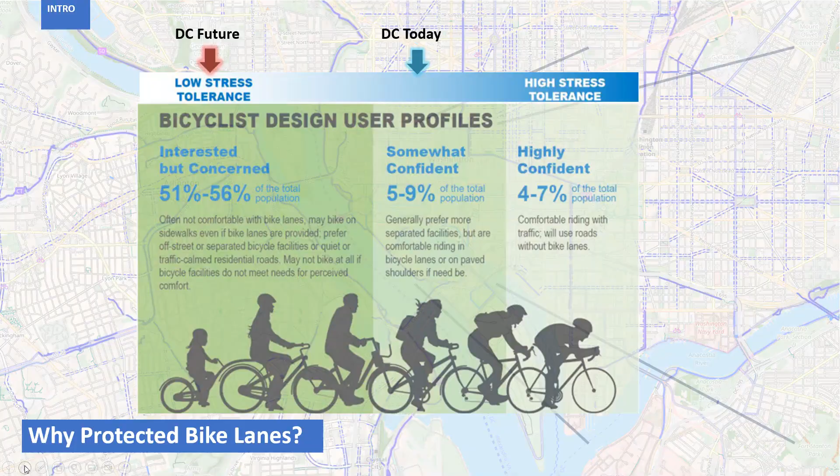In terms of the work we were doing on the 15th Street corridor, as with most of our projects, we begin to look at the existing conditions evaluation, how do people walk, scoot, bike, roll and drive, where are crashes happening, etc., before moving into the design and 100% design of interim improvement plans, with a 30% design of more longer term improvement strategies that would occur once those interim improvements are evaluated, and then ultimately can be completely designed in that 3 to 5 year time frame.

Of course, NPS is a large stakeholder within the corridor we're looking at, and so how did DDOT and NPS also continue to improve and maintain those improvements as well?

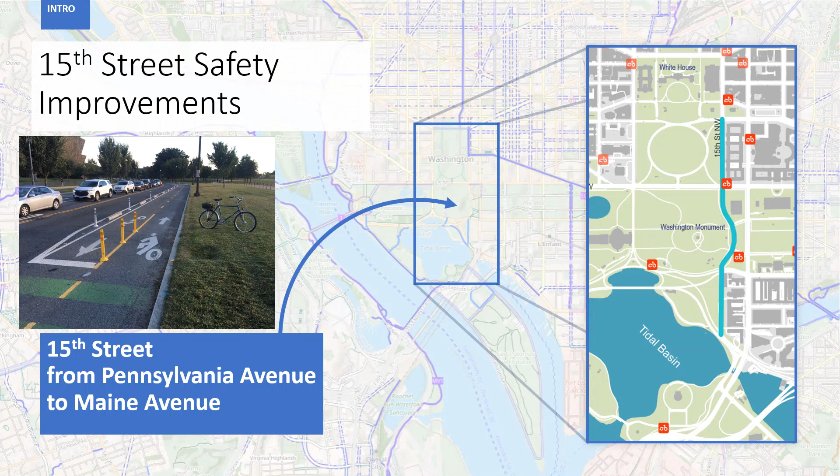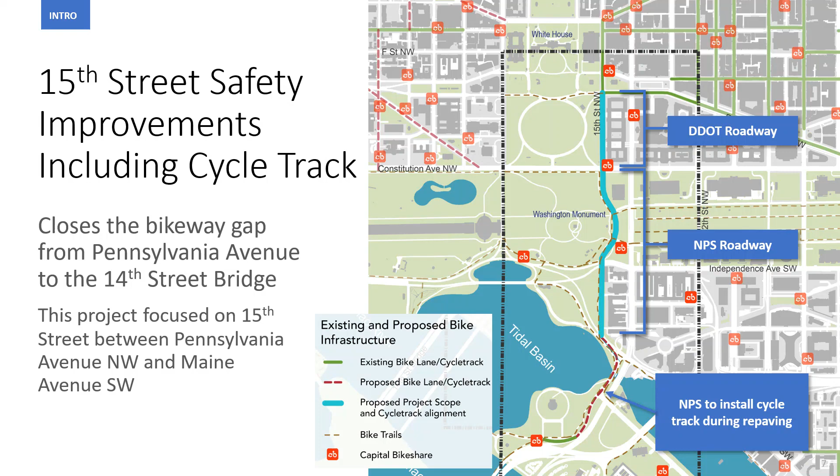So the corridor itself is the 15th Street safety improvements, 15th Street from Pennsylvania Avenue down to Maine Avenue. If we look at that, it takes into account not only DDOT roadways, but NPS roadways, and a forthcoming NPS project to the south of Maine, which is installing a cycle track all the way to the 14th Street Bridge. Really this project began to take a look at that missing link on 15th Street between Pennsylvania Avenue and Maine Avenue.

This is born out of almost a decade plus of planning. It was incorporated in the National Mall Plan, it was in the MoveDC Plan of 2014, it was in the Paved Trails Study from NPS in 2016 as well, and really begins to fill in this missing link both locally as well as regionally within that central CBD area of DC, heading out into North Virginia as well.

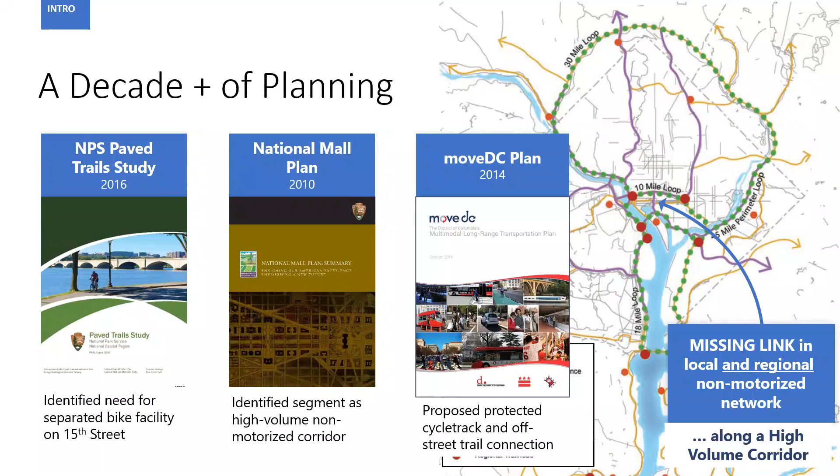And it's certainly confirmed through big data as well, as we begin to look at the shared scooter heat maps and the Capital Bikeshare maps, as well as Strava, that you can begin to see here. The 15th Street corridor is one of those vital connections, not only for everyday activities for commuting and getting into the central business district, but also for tourists as well. It's certainly right there in one of the nation's capital's most iconic corridors.

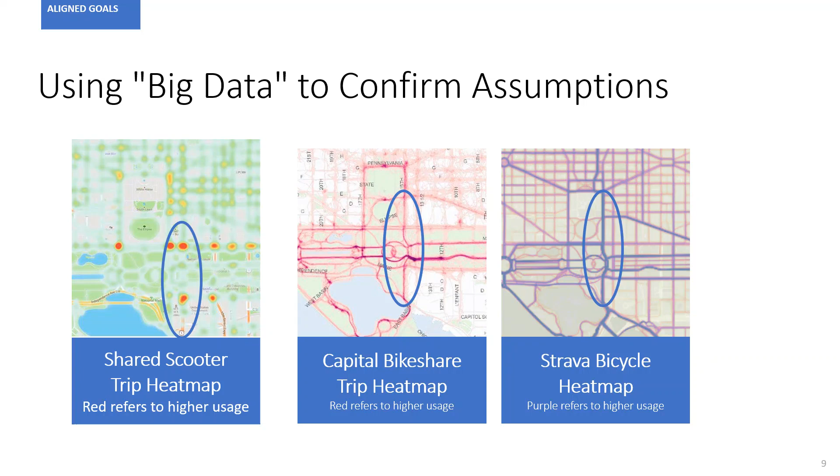So how did this begin to get funded in terms of the design? DDOT were creative and began to look for funding to handle these odd ownership and legal divisions as it relates to NPS and DDOT, and the Federal Lands Access Program enabled them to use funding for not only improvements of safety, but improvements to multimodal access as well. And it enabled DDOT to actually own the project management and spend those funds on federal land. So it was almost a win-win situation for DDOT as well as NPS moving forward.

In terms of who we've begun to consider in the design, we knew we were trying to accomplish three things: safety, ease of use, and then balance that access and delay as well. And we know there are multiple ways people were getting around within the corridor. As we mentioned before, it's rolling, it's scooting, it's transit, it's personal vehicle ownership. Lots of different user groups that we had to entail here, including visitors, who are certainly an important user group.

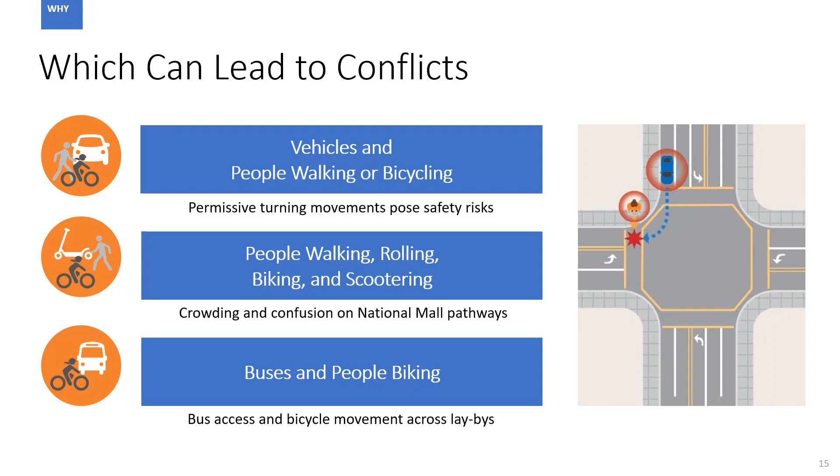There's 3 bus laybys that we had to incorporate along the National Mall on the west side of 15th Street. There's a DC circulator route. There's the big bus sightseeing companies that begin to use these laybys. And they all really needed to be considered, because there are multiple conflicts we've begun to see throughout the corridor, particularly at the major intersections of Independence and Constitution on 15th Street. So we certainly had to align with them as well.

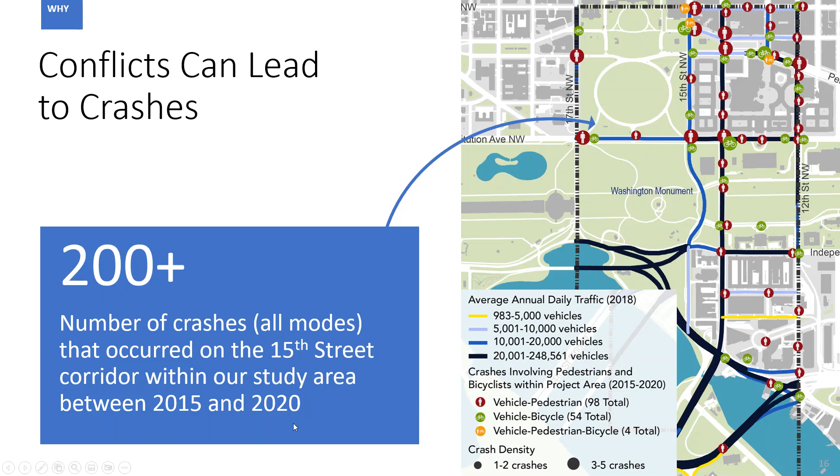Looking at the crash data, as we began our study in 2020, looking back from the previous 5 years, there were 200 plus crashes within the corridor of multiple types, all of which could generally be minimized to a certain extent through better design.

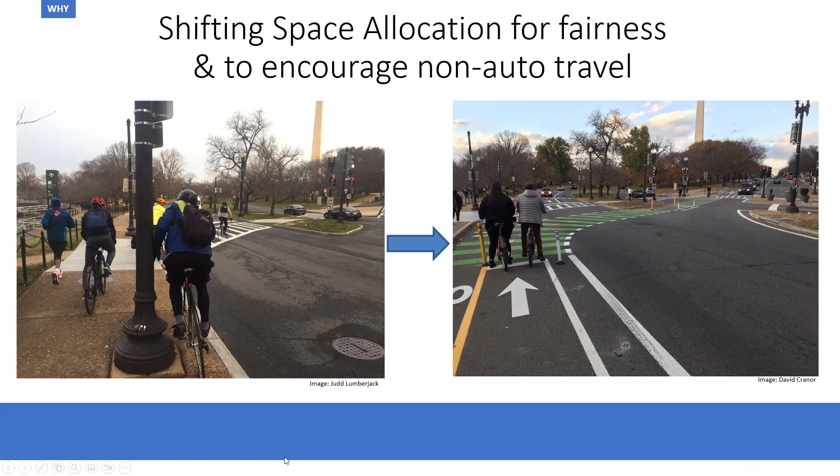If we look at why we wanted to shift space for fairness, the picture on the left shows cyclists using the sidewalk, with a runner there too, and no dedicated space for any particular user or non-auto user. The picture on the right shows after the project was implemented, which begins to show why shifting this space makes sense.

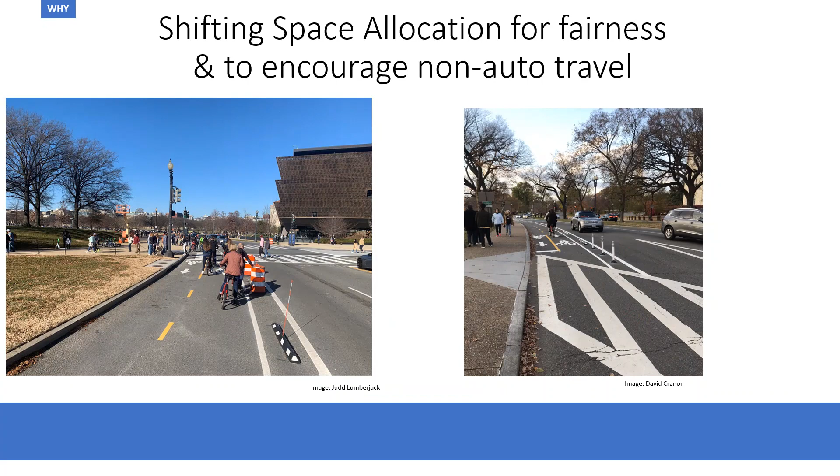The pictures we have are both after the fact, sourced from different users online, from social media, of people actually using these facilities once implementation was undertaken. This is always a good one - new space, new constituencies.

The 15th Street cycle track was actually a completion portion of the East Coast Greenway as it moves through DC. It's making people realize how implementation and design can be done correctly, done relatively quickly. As Michael Bradley said, it completely changed the way people look at streets and what can occur once things are done correctly.

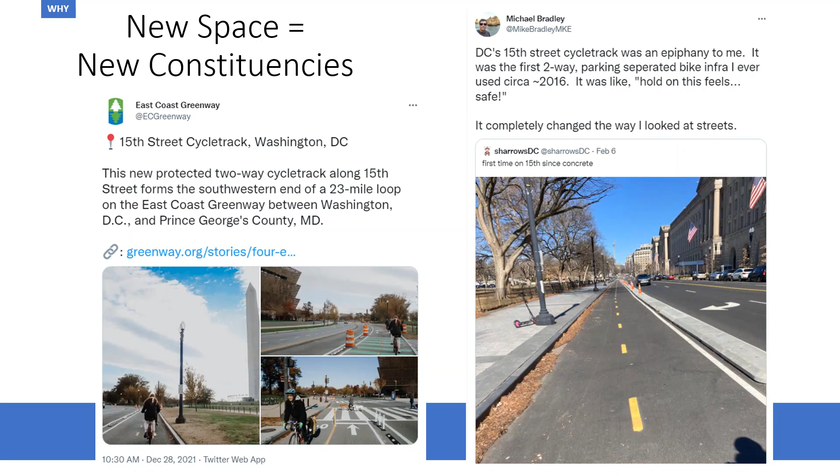What we wanted to do, from a coordination perspective, was really make sure we had equity between different uses. You can see here, this is a before picture - riders are amongst parking, amongst regular travel lanes.

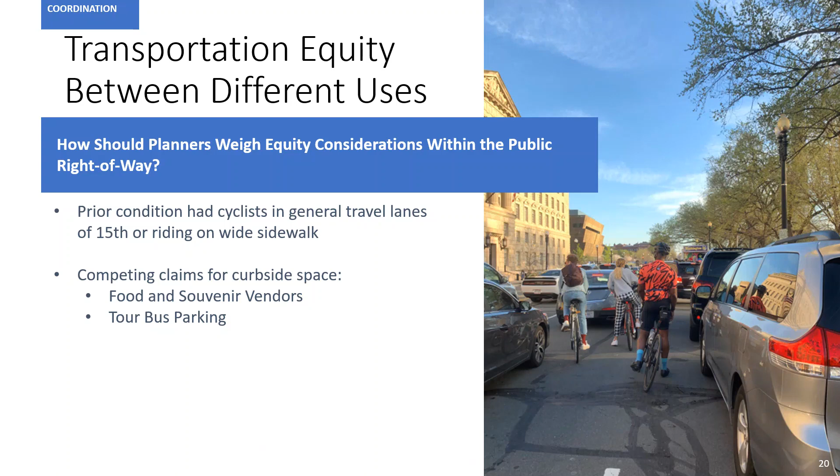We knew there was curbside space use going on, certainly through the portion between Pennsylvania and Constitution, where there are food and souvenir vendors and tour bus parking. Being able to make sure those uses were also considered and able to be relocated - they were relocated relatively close to their existing locations.

It was ultimately a decision by DDOT to make sure the curbside use was being used correctly and for the highest and best use, which wasn't necessarily vending for that purpose, but making sure those people making a living on a daily basis were not put out of business - they were relocated. With that, Will can go into a little more of the design considerations that our team, as well as DDOT, went through.

Yeah, thank you. I think John's going to take this. Yeah, okay, sorry John. I think you and I could probably also interject on all this. So when looking at actually designing this... John, you're muted. Of course, I gave my first 30 seconds up to muting. So I guess maybe when I play the video, it mutes me.

So just believe that this is actually a live action shot of folks enjoying the tidal basin, our new facility, during the Cherry Blossom Festival last year.

From the outset of this project, one of the conditions was we wanted to try to keep everything within the existing curbs. Similar to a lot of the rapid deployment of improvements around DC, this was viewed as a paint-and-post type project where we wouldn't be moving any hardscape, and we tried to allocate everything within the existing paved footprint of the roadway along 15th and the cross streets as needed.

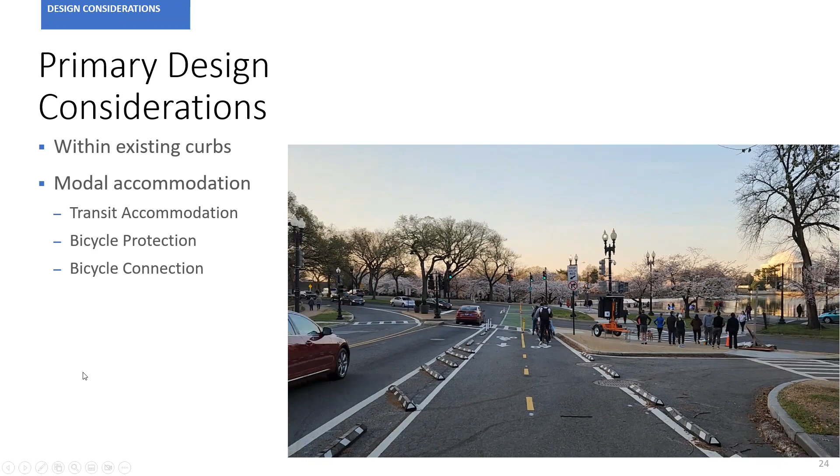Looking first at the transit accommodation, Iain had talked about there being 3 bus laybys along the corridor - 2 on either side of the Washington Monument, and one further down the street, across from the Bureau of Printing and Engraving. One of the things we were looking at was the conflict with cyclists hugging the curb and then having bus conflicts coming across a two-way cycle track - that was something we needed to think through a little bit.

But then as we started iterating on what are the situations, what are the conflict points, what are the realistic situations that would come up, we realized that that really was not going to maximize the real benefit of the corridor and really achieve the goals of what we're out to do.

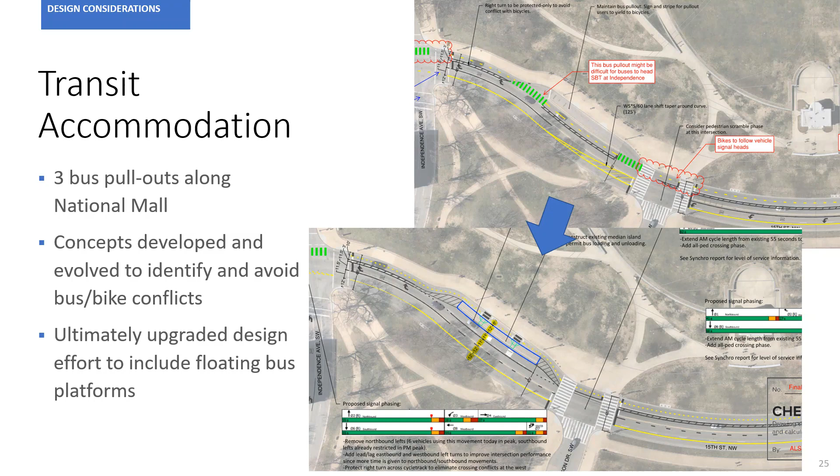So this actually shifted a bit to accommodating a more robust design, and that included developing these floating bus islands, which is, if you've been out there in the last year and a half, you've probably noticed.

This is a good before and after shot. This is the northernmost one, just south of Independence at Madison Drive, where before they had this narrow median separating the bus lay-by from the sidewalk. So what we did is we actually created these bus platforms that are floated on the other side of the two-way cycle track, indicated with clear pedestrian markings, making sure all the ADA alignment of both ramps was correct.

There's 2 ramps at either one of these bus islands, and we made sure they accommodated a couple things: not just dwell time for folks at the circulator or the big bus, but also, given the mall is a marquee location, the need to accommodate loading and unloading of event equipment like stages, tents, and audio equipment that go on the mall throughout the year. So it was requested that we make sure we're able to accommodate those elements.

But then also to make sure it wasn't too big. As a lot of us working on hardscape and final design projects know, anytime you adjust the square footage, that shift could affect drainage and bump the project up to the next level of effort. So it was also about making sure we right-sized these to achieve all our goals without going overboard and having to rethink a lot of drainage inlets.

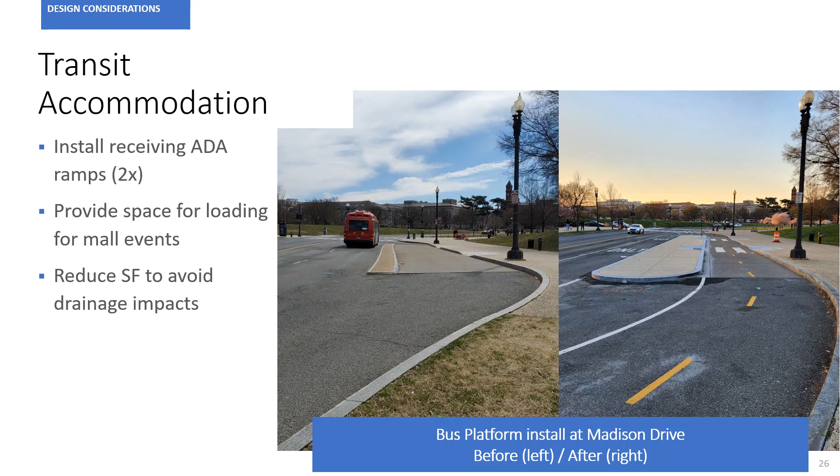So despite all this across all three islands, we did not have to change any of the drainage or catch basins along 15th Street. This was all able to be done, and again, the outside footprint of 15th Street remained as-is after the implementation of this.

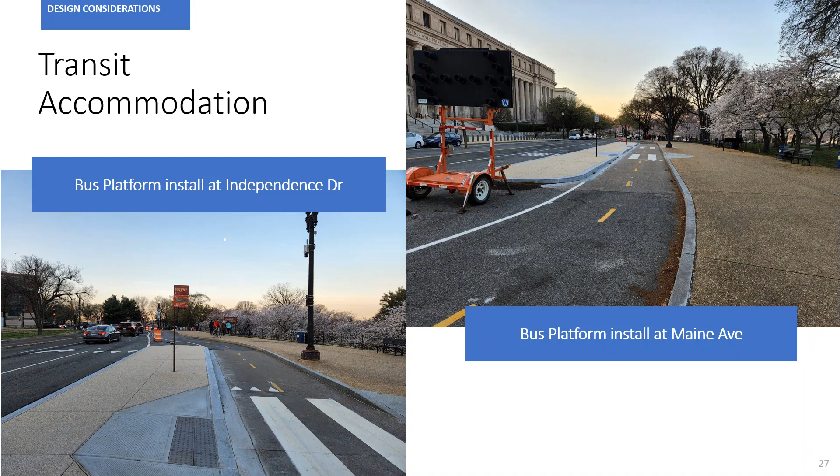So here's a couple other pictures of the bus islands at Independence and Maine after they were completed. And actually this weekend, we got to see them in use.

Taking a look at this, I like this shot because it shows that our cycle track is not just used by cyclists, but also by scooters. Also, if you're out there, especially during high tourist season, you'll see a lot of Segways and things too. But what this illustrates is that, in terms of equity and providing space, we literally provide space for everyone in this photo.

So quite literally, the transit vehicle has a space pulled out - this is a bus-only lane, separate from the general traffic lanes. We have more than enough space for pedestrians and transit riders to dwell as they load and unload on the big bus, completely separated from the non-motorized wheeled vehicles on the cycle track. Also a gorgeous day this weekend if you guys were out there.

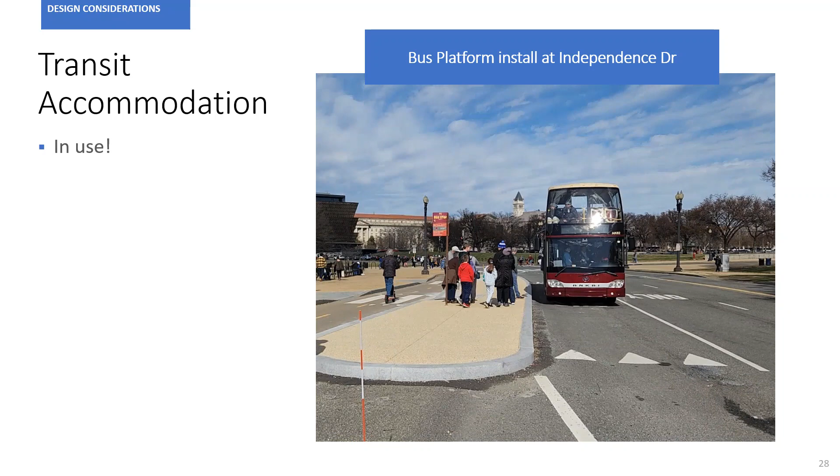So going a little bit more into that bicycle protection, providing that space - one of the things we wanted to make sure we had was a very clearly defined barrier along the entire extent of the project we were working on. This had to have a variety of strategies. I think ideally we would have wanted a single solution through all this, but as we'll get into, we had to get a little bit creative through the different segments.

So we had three major strategies. At the fundamental level of buffered width, we made sure we tried to maintain about 2 to 3 feet of actual space between the white lines from general traffic. Then in terms of vertical elements, utilizing some of these rubberized zebra wheel stops within the National Park Service extents, we were able to install the long-term solution, which is these modular concrete precast barriers.

This is basically in the extent north of Constitution here. And then ultimately, along this National Park Service section, we plan to replace these rubberized wheel stops with actually a very similar median to what had existed previously out there, separating the bus bay from general traffic. The reason we have an interim condition and an ultimate condition is that National Park Service is slated to repave this extent of 15th Street, I believe, this year. That's correct, Will? Yeah.

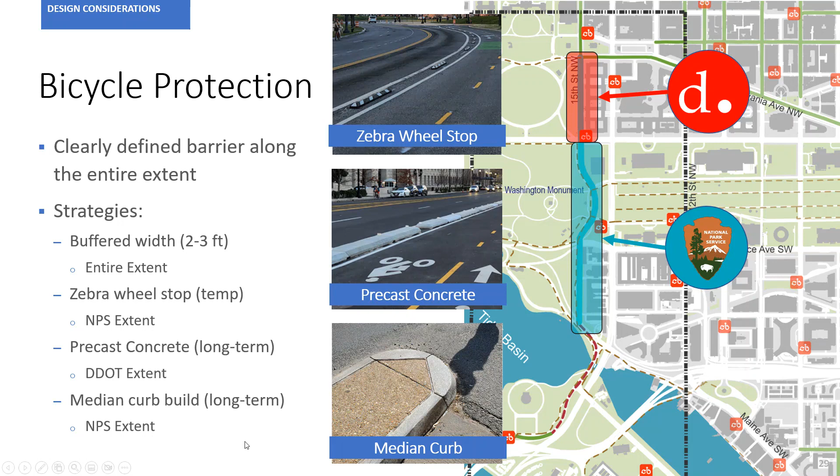Here's some other examples of this implementation, along Maine Avenue. Previously, for those who may have rented a paddle boat down here by the tidal basin, there was a third lane here that we never introduced—it was an add lane further upstream down the hill. So we simply removed that and consolidated everybody into 2 lanes for through continuity on Maine.

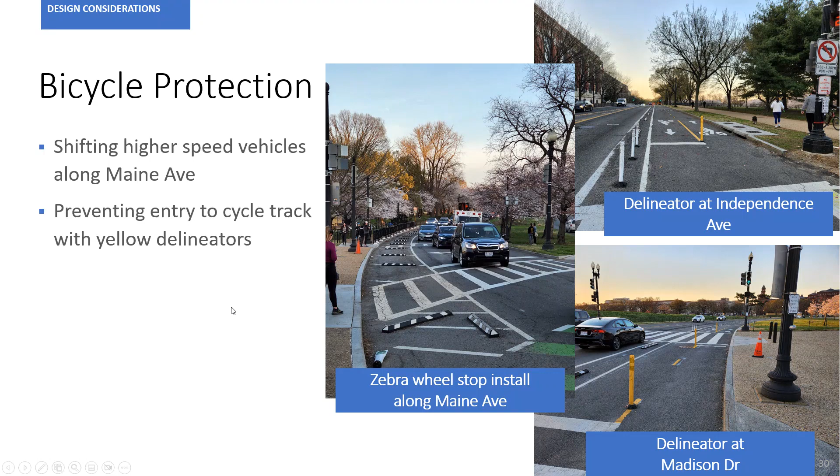We also wanted to try and keep vehicles out of this cycle track. Anyone in the bicycling community has probably seen no shortage of pictures of people parking across cycle tracks or in bike lanes. So providing these yellow delineator posts is meant to keep people out, especially given the context of where this is—a lot of people like to pull over and take pictures. We wanted to make sure that was clear for folks using the cycle track.

So not just physical protection, but also protection in time using traffic signal phasing coordination. In the contraflow direction—northbound relative to the southbound vehicles adjacent to that—we wanted to make sure we provide bike signals at all key locations. The geography here was unique since there were only a couple cross streets we really had to be mindful of, given it was mostly along White House property, Ellipse property, and against the Washington Monument.

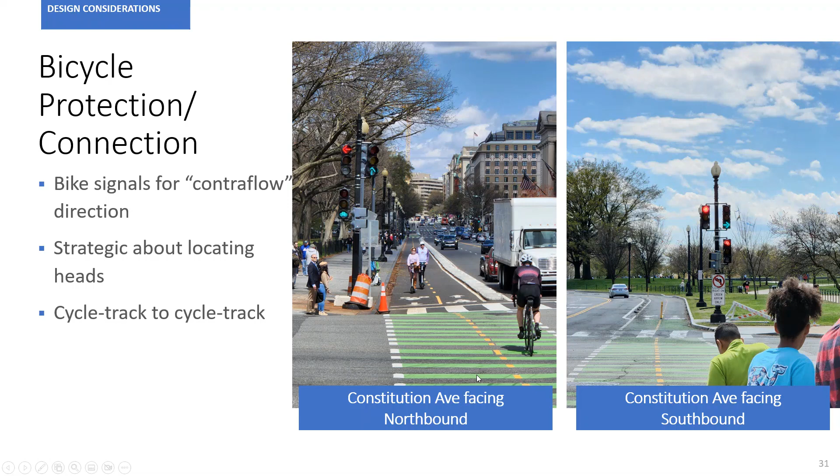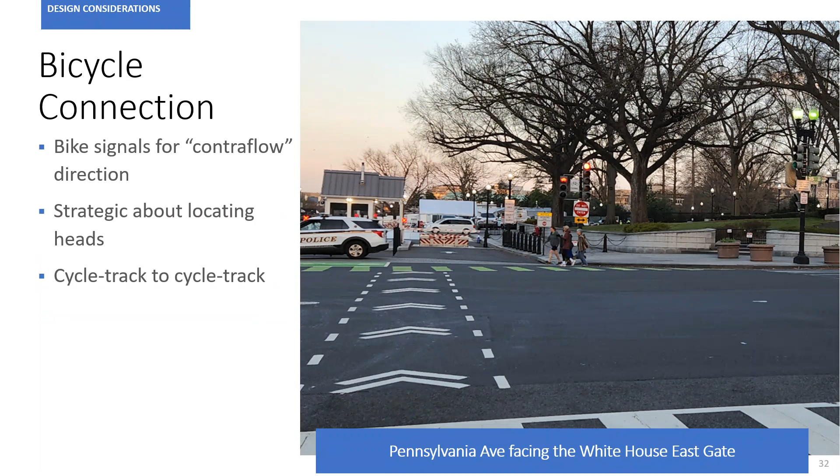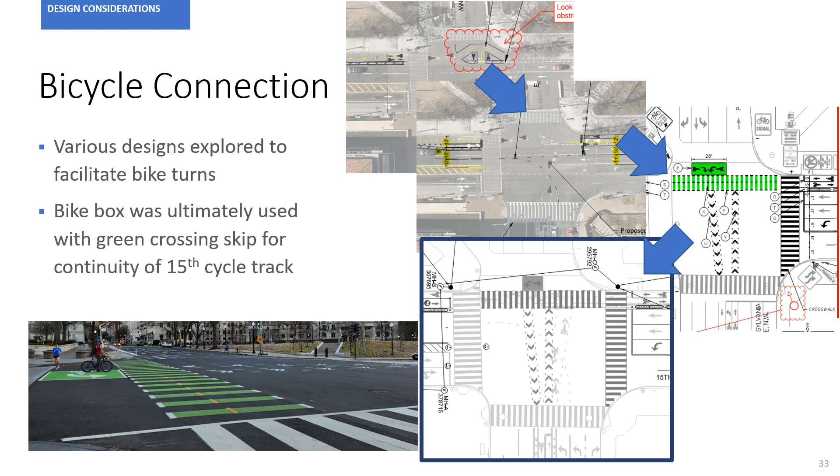The real fun design came at the cycle track to cycle track situation. For those familiar with the Pennsylvania Avenue cycle track in the middle of the road, this was a tricky one to figure out—there aren't a lot of examples of cycle track to cycle track, particularly where one is on the side of the road and the other is in the median. We had to go through a couple design iterations to figure this out, going back and forth with protected phasing and bike-only phasing, but ultimately rested on the utilization of the bike box, overlaying bike movements within the existing phasing pattern.

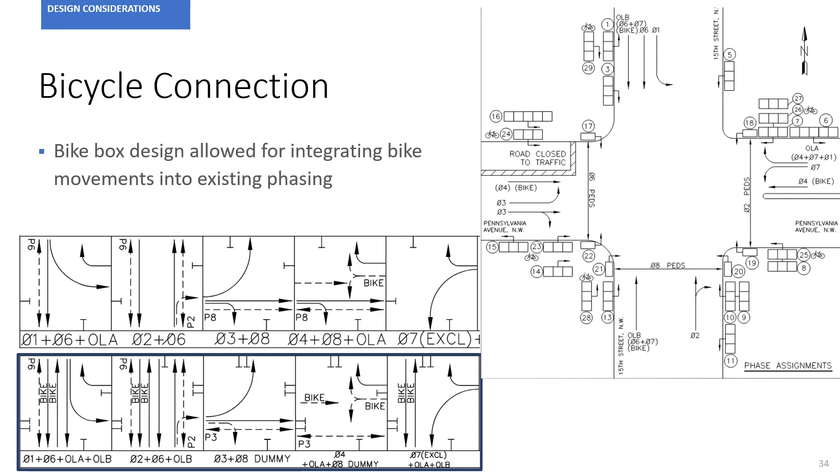So this did require updating a few of the signal heads out there to make sure that we accommodated that, and making sure all bike movements had visibility of their signal indications. But we were able to overlay that in there, which was good for the DDOT traffic folks, and it also made all of our connections, which was great for maximizing bicycle connectivity and safety.

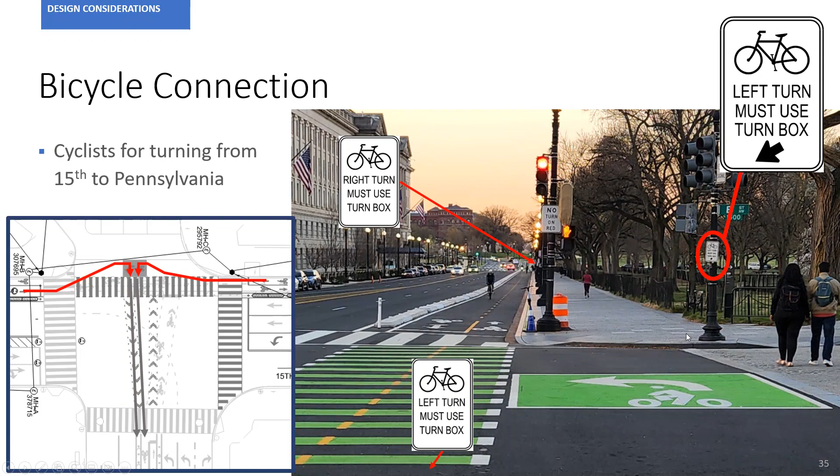Looking at the bicycle connection, utilizing good information about how to use the bike box. So if you're actually turning, we tried to make this as big and prevalent as possible for folks to recognize that if you wanted to go down Pennsylvania Avenue, wait there and then wait for your bike signal, and that'll get you looking at the plan view here overhead into the eastbound Pennsylvania Avenue cycle track.

So I'm going to hand it off to Will to wrap us up here, and this will be more of the getting it done between DDOT and the other agencies. Thank you, John. Pleasure to be here.

As I mentioned before, we had a couple of different repaving schedules, a couple of different segment owners. DDOT owns between Pennsylvania and Constitution. And in planning the work, we were able to synchronize it with another team of ours, Asset Management's full repaving of the street. The way we often work with them is we make a deal: if you repave this street, we will put in all the markings.

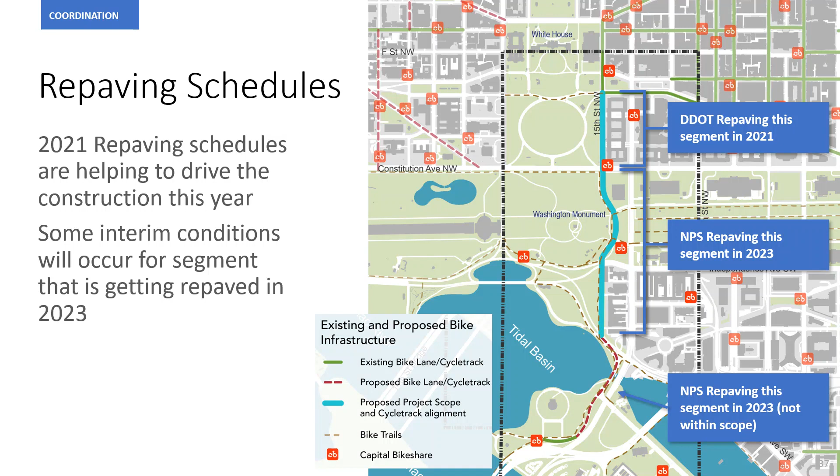So they save a little bit of cost on their end, and then we're able to avoid the eradication of markings, which is a noisy and somewhat difficult step to do, especially on a busy street next to the White House in this case. And because of a couple factors, we were able to limit the amount of eradication on the area south of that, which is NPS ownership.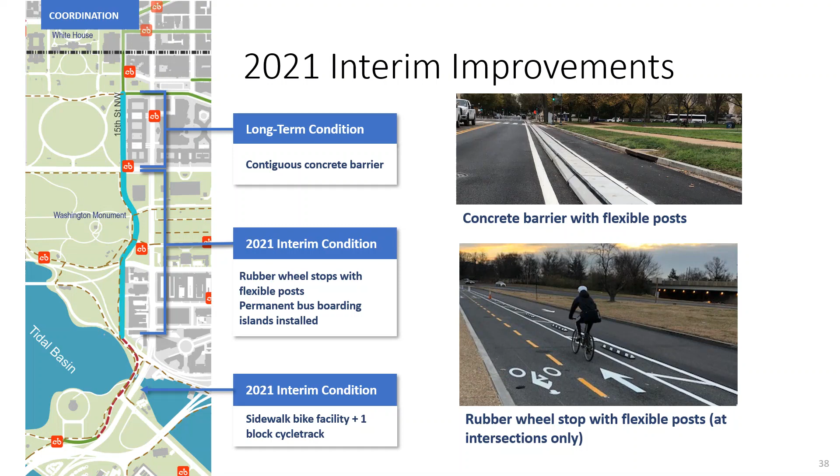In general, we designed all this in 2021, implemented between late 2021 and finished in 2022. We were able to look at these interim conditions that we were going to have, with an eye to not making them permanent throughout the entire corridor, because we knew NPS had a repaving coming up two years later. But we made sure we had a functional facility in the time between when we finished this design and when NPS would come back and make a permanent granite buffer protected facility.

I think one of the key things that's really important is it's very easy to spend time in transportation on delays and things like that. We were really committed to having a deliverable very, very quickly, and we were able to achieve that.

The biggest challenge was putting in these granite bus laybys, because they were a large feature that needed to be fully constructed. But John's team was able to get us a really excellent design. We were working with two different contractors, one that did the concrete installation, and we made that a really quick and almost seamless installation because of everyone's coordination.

If you want to go to the next slide, Iain.

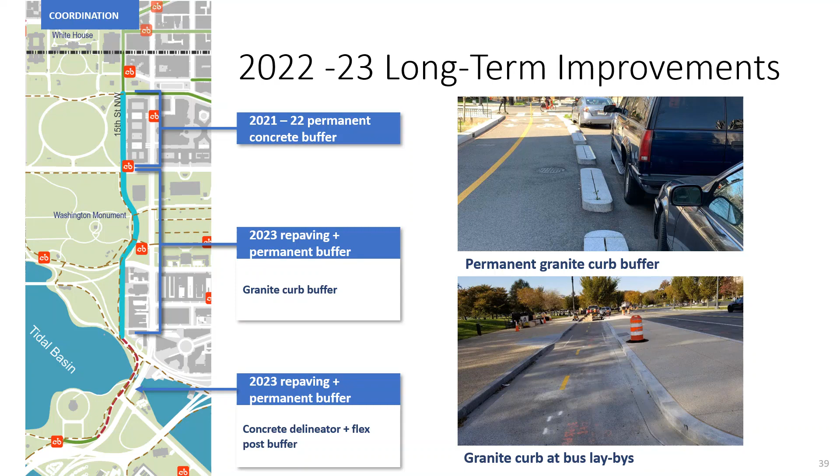The impact has been really profound about how we've seen ridership change. We don't necessarily have great before-ridership data because most of it was happening on the sidewalk and not in the street. But once we got a counter up in the first year of the facility being online, we were tracking about 1,200 to 1,500 daily riders, and this is even before the summer peaks. I think it's probably higher now based on what John and I saw in the field.

Around 100 morning peak-hour riders, 200 and probably pushing 300 now in the PM peak. I think when it's summer or cherry blossom season, we'll see 500 to 600 riders in the peak hours. It's really been amazing to see how broadly used it gets.

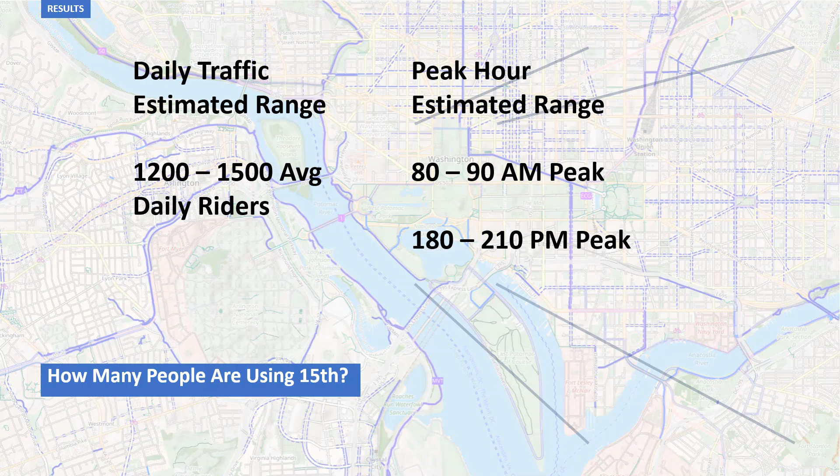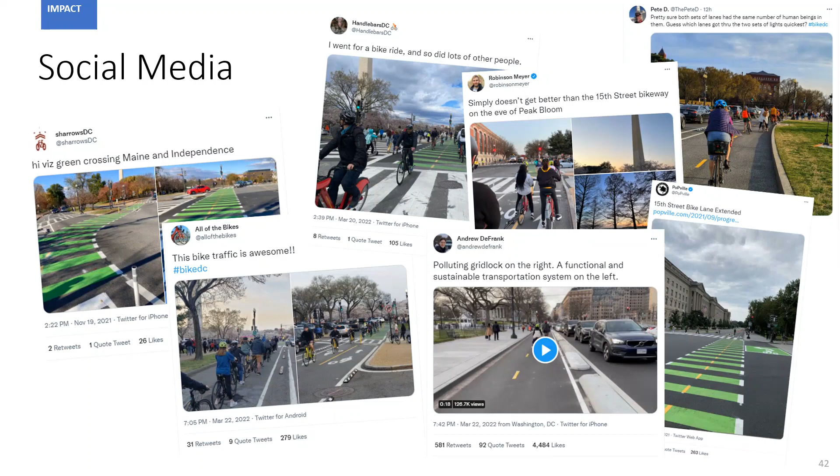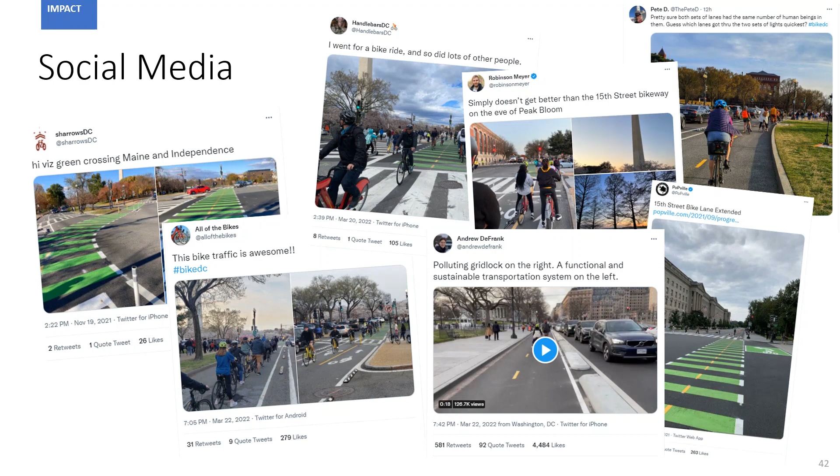If you go to the next slide, we have some photos, and you'll see lots of cyclists certainly, a lot of scooter riders, Segway riders, we saw skateboarders, all kinds of people on different mobility devices like one-wheels. I've seen people using motorized wheelchairs in the facility, keeping up with the same speed as your general rider. And we've done all this without having a deleterious impact on the vehicle traffic throughput of the corridor.

So in general, everything works about the same way on the vehicle side as it did before, with one fewer lane for the entire thing. And it's by being selective about where you have a 4 or 5 lane cross section, right? We had that before. So now we'll have essentially the same capacity at intersections for the key direction, and then instead of 2 receiving lanes, we'll have 1 receiving lane at the intersection. But it usually is enough, and it's been really interesting to see the overall traffic effects not be any worse.

But we're also accommodating all these new users in a really fair and equitable way. And one of our VIP new users is Secretary Pete. He mentioned it in an article related to how he gets to meetings at the White House, and we're excited that one of the highest officials in our field is actually using this stuff on Capital Bike Share, no less — one of our other programs in the city.

So it's been a really interesting and rewarding project for all of us who got to work on it, because it's one of the few that almost immediately saw high use. You saw the connections it was making to the 14th Street Bridge, so now we have an interjurisdictional connection that was really quite difficult before, catering only to something like the commute riders. Now we're able to cater to a much broader cross-section of people for many more uses.